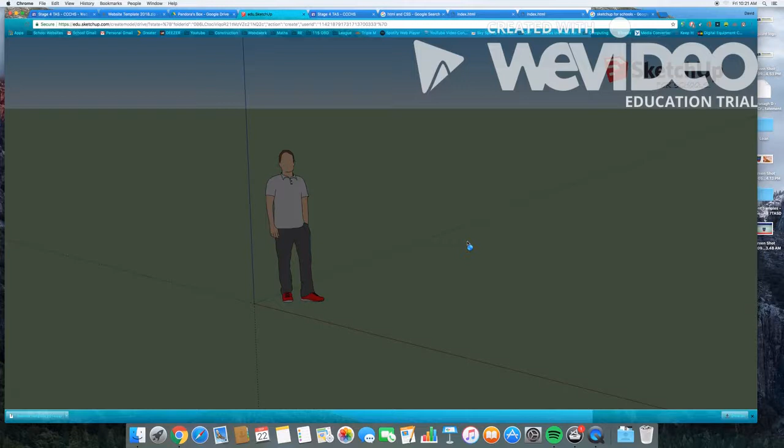Make sure you select the template that's for millimeters. Remove the person.

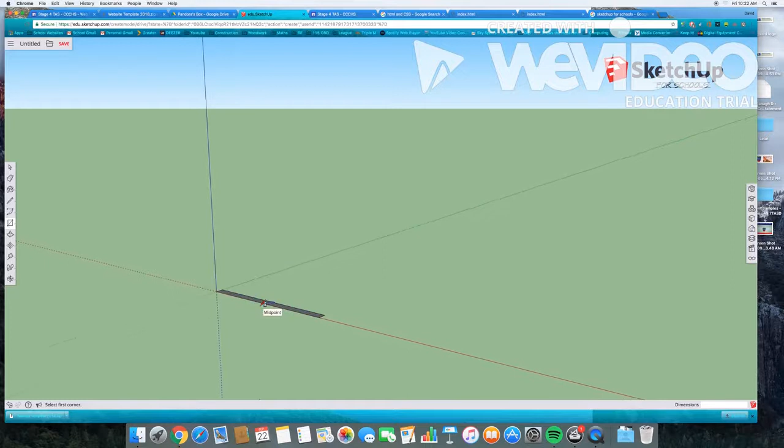Select the rectangle tool. On the horizontal plane, draw a rectangle. In the dimensions, type in 210, 12. It will come up quite small, however you can use your 2 fingers to scroll up to zoom in.

Now select push pull and push your rectangle up and type in 70 in the dimension box.

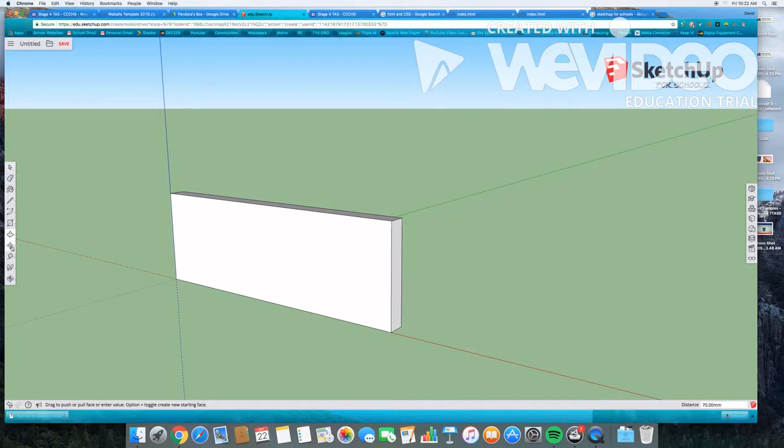Orbit around so you can see it properly. Select the mouse tool, highlight your entire piece, 2-finger click, make component, call your component the side.

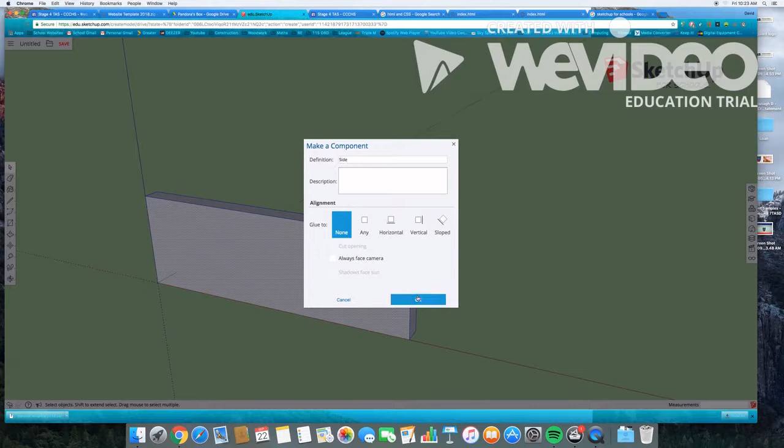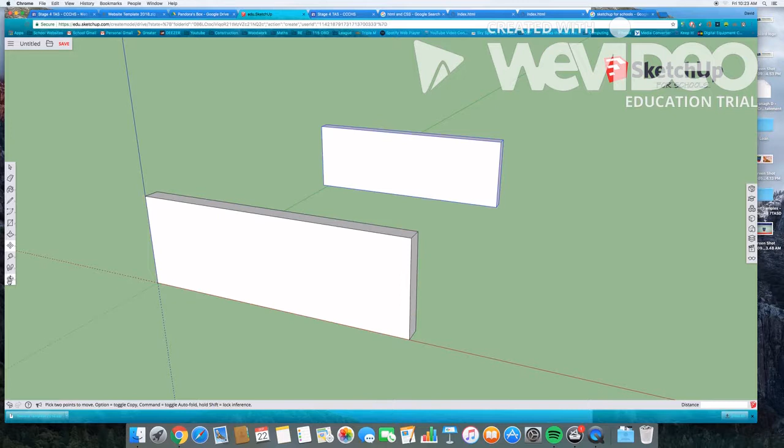Now we are simply going to press Command C for copy. There's no drop down menu for copy, so select the piece, press Command C and then Command V and you'll paste the other side. There's no need to draw the sides twice. Once you draw one component, you simply copy and paste.

Now we are drawing the end. Type in your dimensions, which will be 90 by 12 or 12 by 90. Push pull, 70 high. Again, just typing in the dimension box.

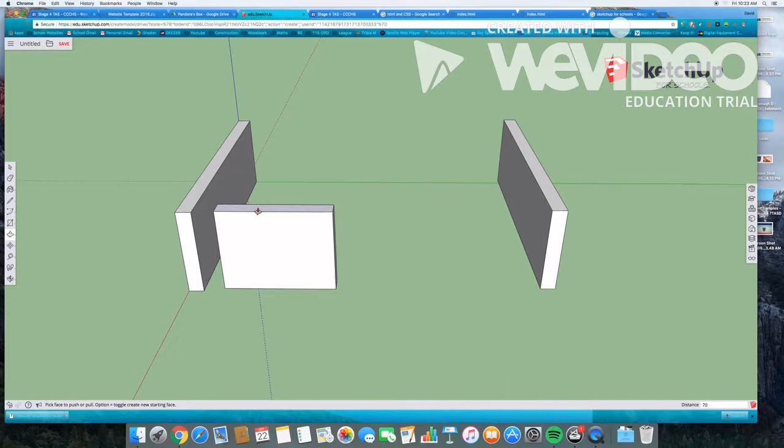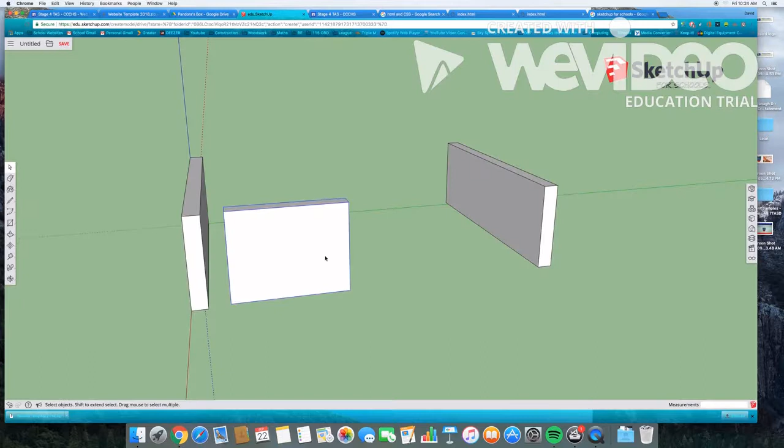Orbit around so you can select the end without selecting anything else. 2-finger click, make component, call it the end. Now select that component, press copy and paste.

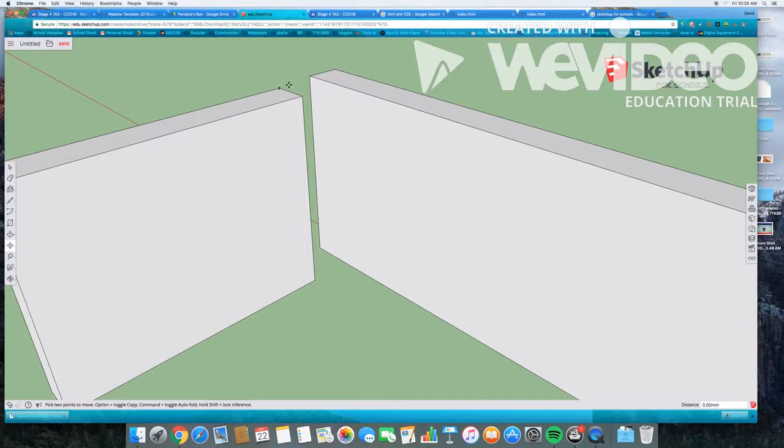Now we're going to attempt to put these components together. Pick the move tool, highlight a corner and marry that corner up with the other corner. Again, pick a corner, and marry it to the other corner. It's always easier selecting endpoints when marrying components together.

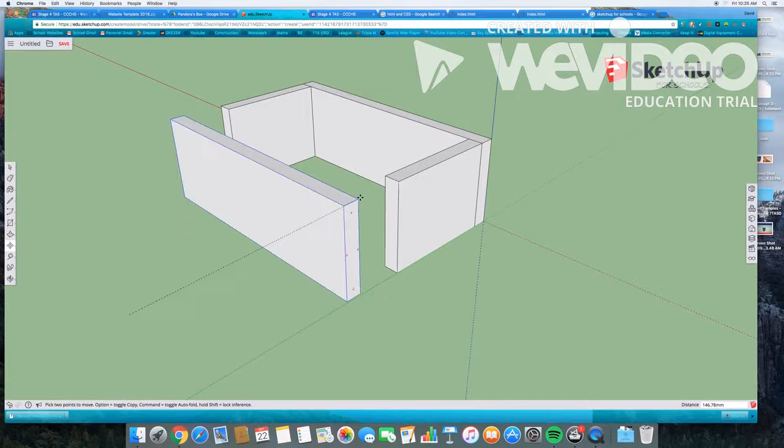I'm going to use the tape measure tool just to double check my measurements for the width and length of the box, so I can draw the base. The base will be 10 millimeters wider from each edge.

Try and select the part on your horizontal plane, which gives you enough room to draw your bottom shape. And I'm going to make dimensions here, which are 20 millimeters wider than what the box was, so I have that overhang.

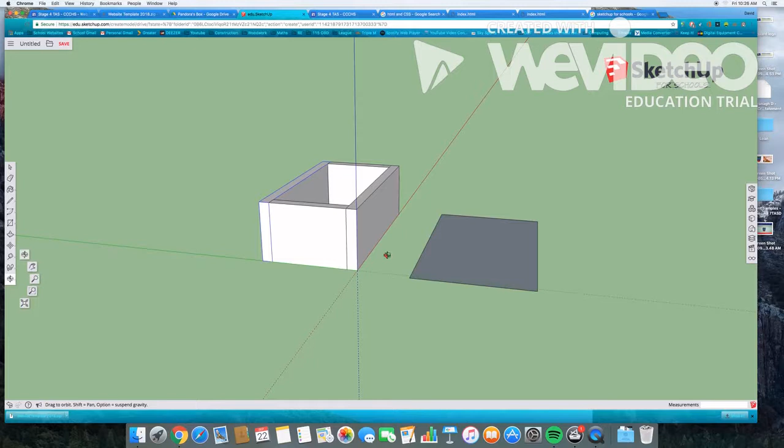Rewind the video and go back and see what dimensions I typed in if you're unsure. Okay, push pull. I'm going to push pull 20 millimeters high this time because it was slightly larger. I'm going to make the base a component by repeating the steps we did before. Call it the base.

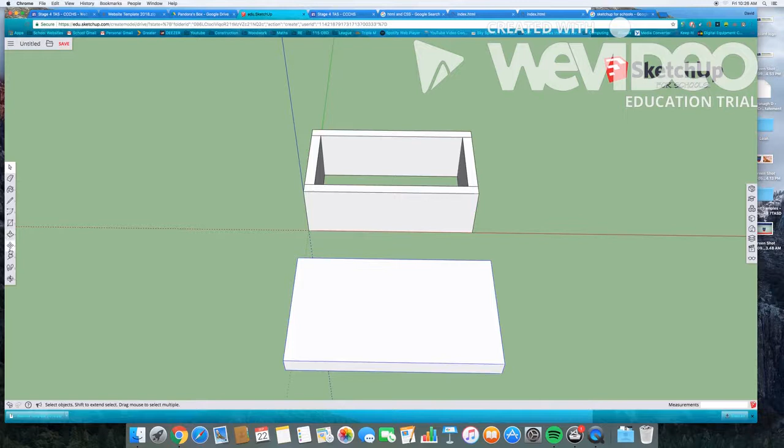Now we're going to move that base into position. Firstly, we're going to marry that endpoint to the other endpoint on the box, on the bottom there. Sometimes you need to orbit around and fiddle around just so you can get that endpoint up with the other one. There we go.

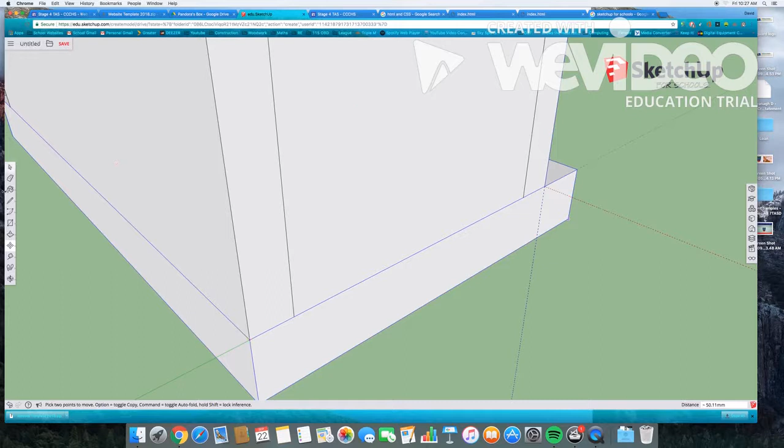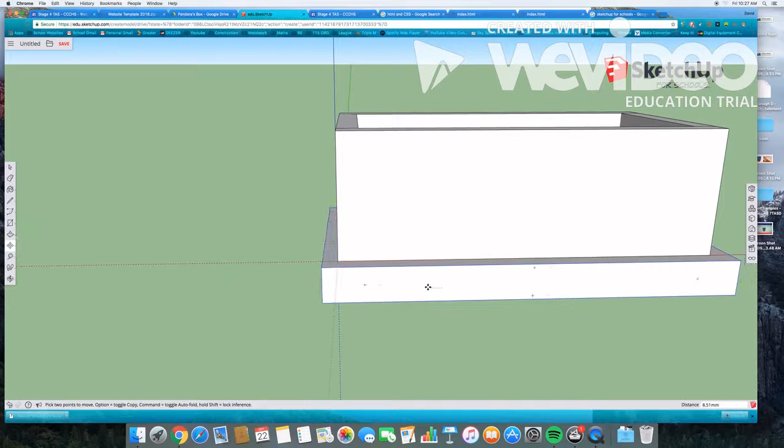Now I'm going to get the move tool, orbit around so I can see that plane. The move tool on that plane, I'm going to move it across 10 millimeters. Orbit around so you're onto the front plane there. And again, get the move tool, move it across 10 millimeters. So we have that 10 mil overhang on each side.

I'm going to double check my measurements again, length and width, in order to make the lid.

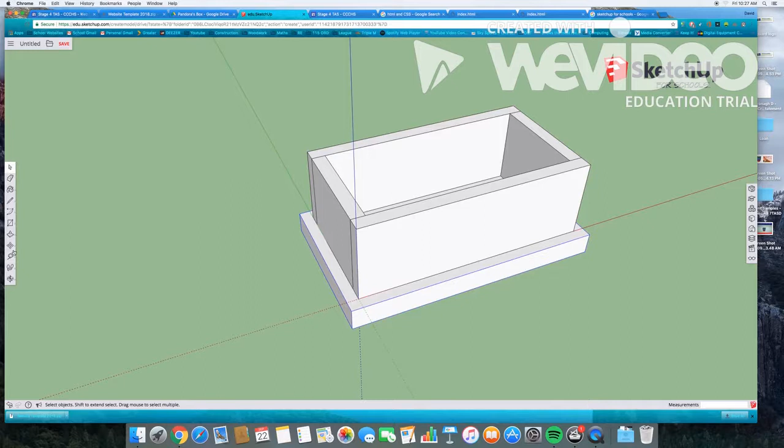Make sure you draw the rectangle on the right plane, on the bottom plane there. Horizontal plane, call it. The rectangle dimensions are the same as the top of the box. I'm going to push pull here to make it 20 millimeters high.

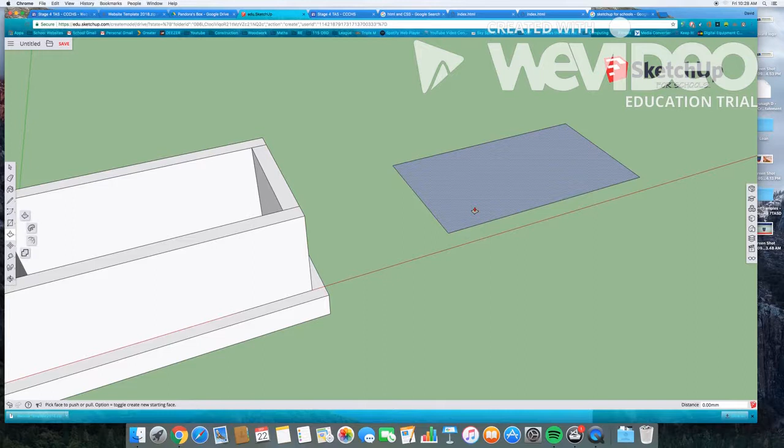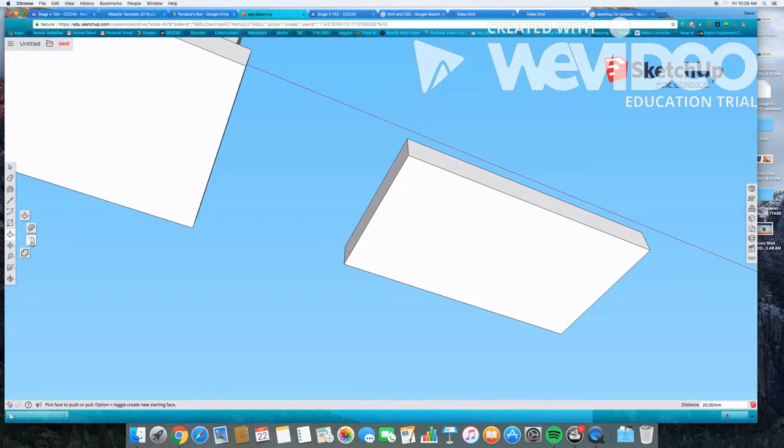Orbit around so you can see the bottom of the lid. You use an offset tool here. That's the offset there. Okay, see if you can draw that rectangle. Okay, you just simply have to type in 12 millimeters. That will offset that from the edge. You can push pull that down.

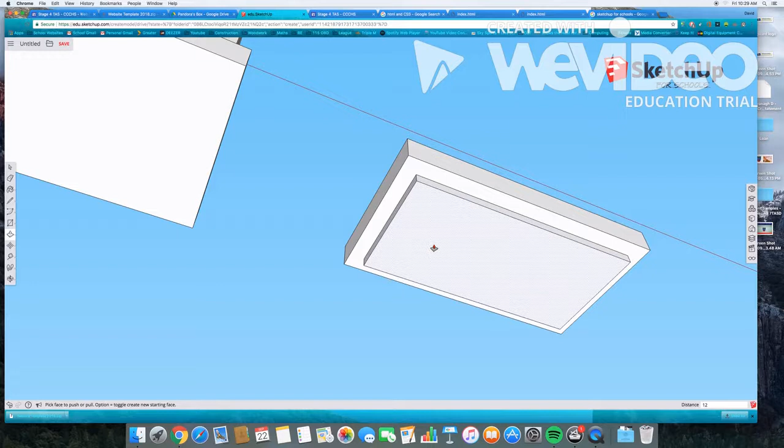Use 6 mil this time because we used slightly thinner plywood. Lastly, make that a component and call it the lid.

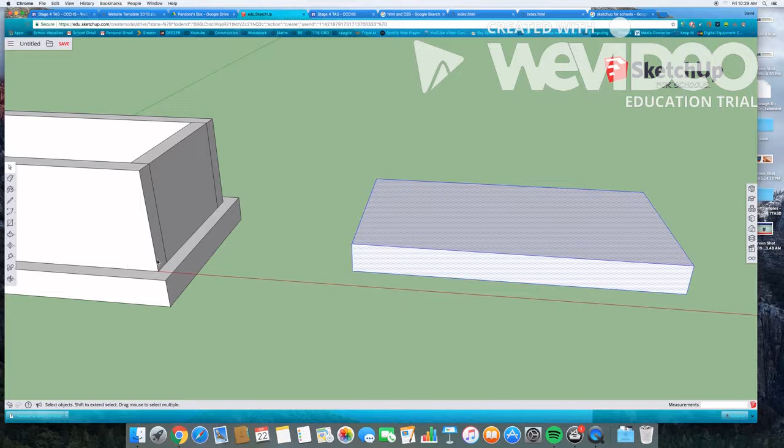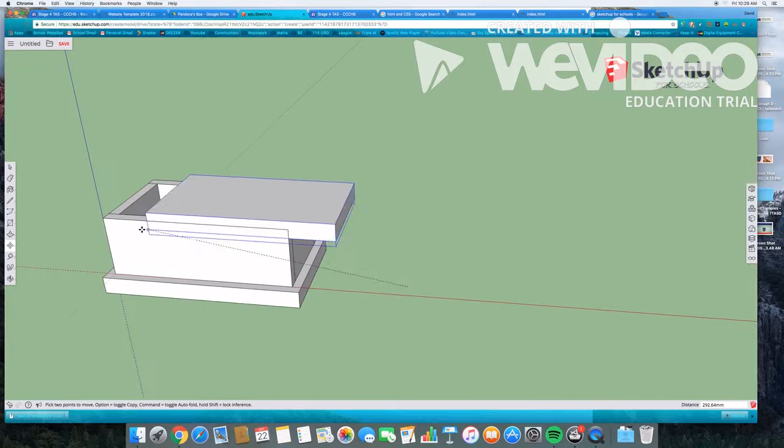Now we simply get the move tool, select that endpoint and marry it up to the endpoint on the sides of the box. And that completes the construction of the box.